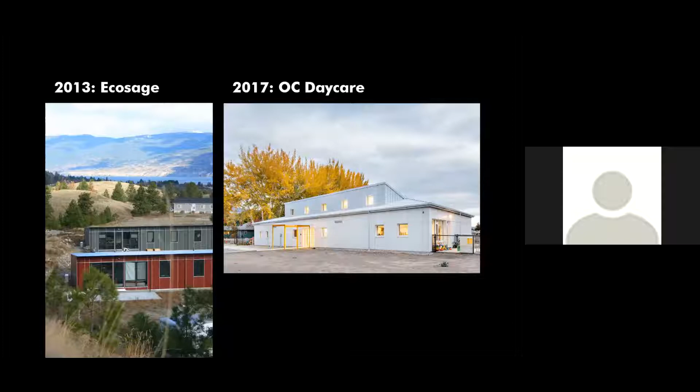Just a little bit of context to begin with. British Columbia has committed to something called the STEP Code, which has been written into the building code for the province. The goal of STEP Code is that by 2032, all new buildings in British Columbia will be net zero ready, meaning that with a reasonable investment in renewables, they can be made net zero energy. As a country, Canada has committed to net zero carbon emissions by 2050.

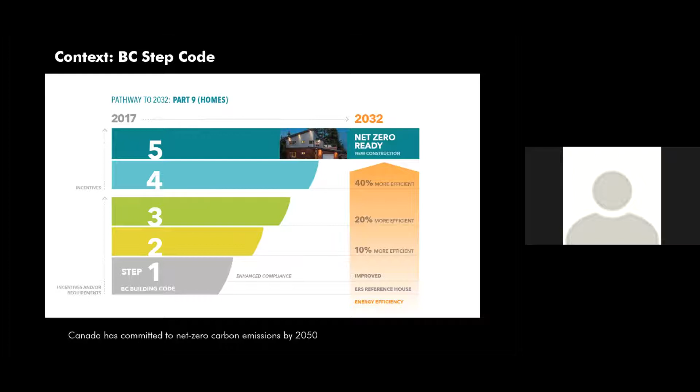So the work that we're doing, the work I'm going to talk about tonight, is moving towards these goals.

The Ecosage project, as I say, was done in 2013. We worked with Tabitha Enius at Penticton Indian Band, who runs their housing program. The builder was Nick Hill from Ritchie Custom Homes, and we had quite a bit of assistance from Fortis BC. Funding for the project came from the Penticton Indian Band, the Ministry of Energy Mines, etc., Fortis BC, and a contribution from Solar BC.

The funding primarily came from a program called the Super Efficient New Construction Program, which the provincial government was administering. The goal was to construct super efficient, marketable homes that would achieve a minimum energy rating, primarily through passive solar design, envelope construction, and super efficient equipment.

The houses through the Penticton Indian Band were given out to band members who could carry a mortgage, and that was a new program at that time. There's quite a housing shortage for band members, but these houses in particular required you to demonstrate that you could carry a mortgage to qualify, and 8 houses were constructed.

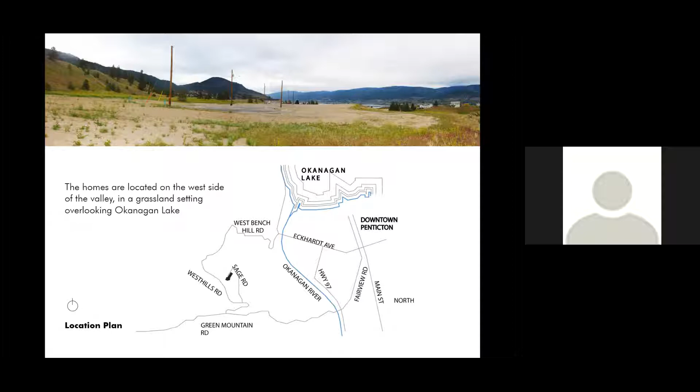There were 8 houses in total, and we arranged them all so they would face as close to south as possible. 6 of the houses were to EnerGuide 88 standard, 1 was rated by the LEED standard, so LEED Platinum, and the final one, which I'll focus on tonight, was certified passive house.

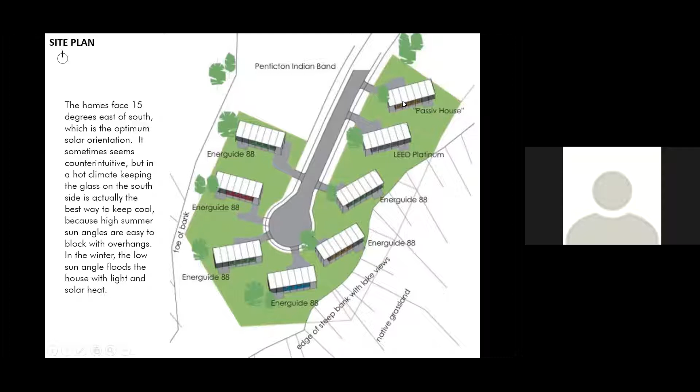The designs for the homes were very simple to keep costs down. Landscaping used xeriscape landscaping and durable, fire resistant materials.

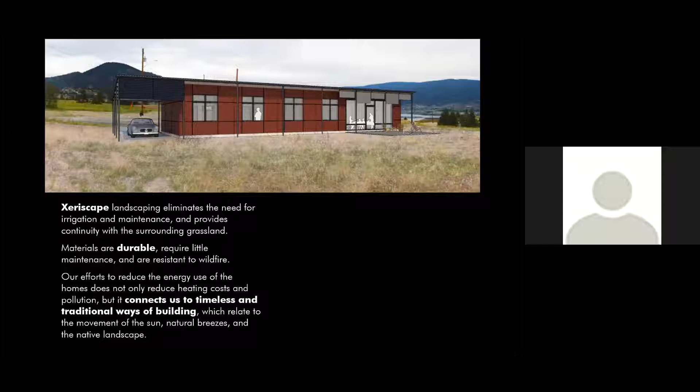The plan of the buildings was a simple rectangle, 4 bedrooms, a living space, and then all the services along the north side. In section, we sloped the roof up towards the south to open the buildings up towards the southern sun, and in that way get passive solar heat gain. The rest of the building was super insulated and openings were kept to a minimum.

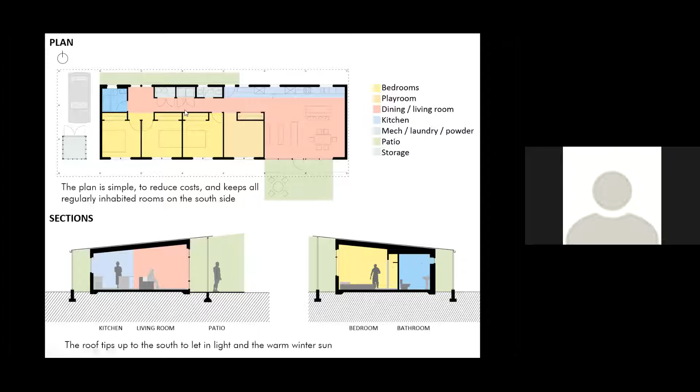The key to passive house certification and really to energy efficient design is the insulation. So the houses were designed to be super insulated boxes. We had light frame trusses for the roof, double 2x4 stud walls, and a well insulated slab on grade. And then that was made airtight so that the minimum of heat and air would be lost through the assembly.

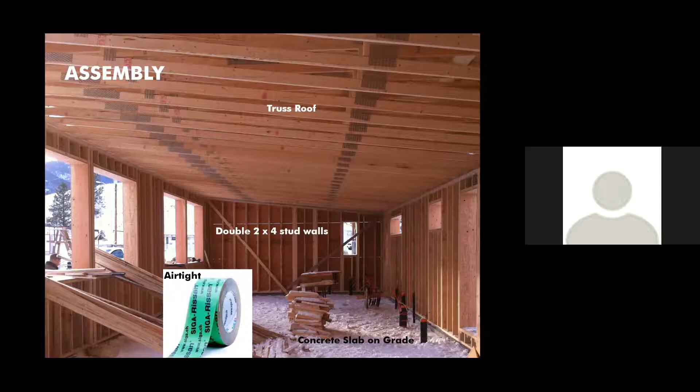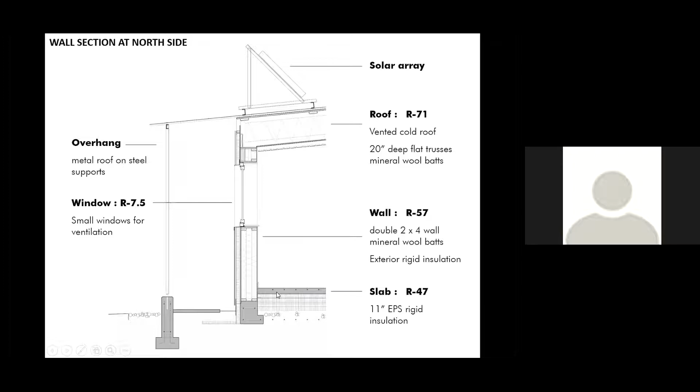And then the south side of the building, we tried to get as much glass as possible to allow that winter sun to give you passive solar heat gain. We have exterior shading to block the sun during the summer, and a good overhang also to block that sun during the summer.

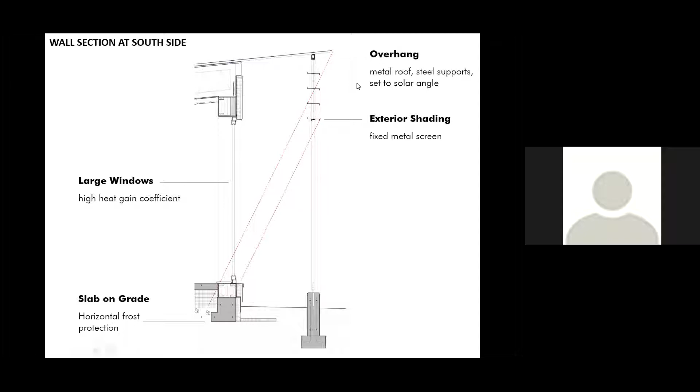Outside, the buildings had very generous overhangs. I particularly like this picture because it shows how that roof overhang on the south side - this is taken in about July - perfectly shades all those windows along that south side. You're getting a very little bit of sun coming in at the living room, but for the most part, completely protected from the sun in the summer. And in the winter, with the low sun angle, these windows would all be getting full sunlight.

The very light roof structure was supported by an exterior steel structure to provide protection all the way around the house. The siding is cement board and the roof is corrugated metal so that they're very fire resistant - of course, it's in an interface area. The windows are triple glazed, a hybrid of PVC and fiberglass. And the insulation is mineral wool that's manufactured in Grand Forks.

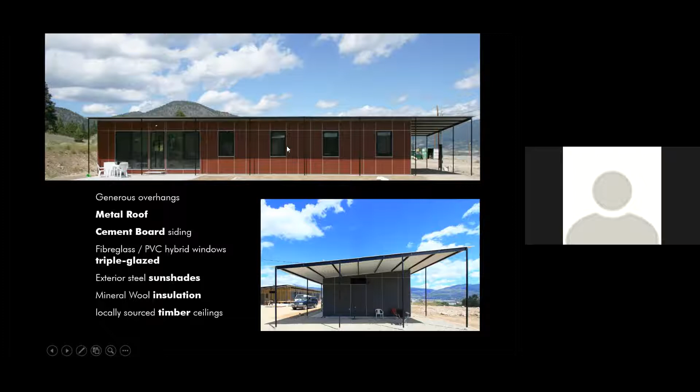Inside the houses, we had an exposed heated slab, and we used locally sourced wood for slat ceilings.

The equipment for the house, very efficient. We had a heat recovery ventilator so that lots of fresh air is brought into the space without dumping it to the exterior. We had a brine loop below the slab to preheat that heat recovery ventilator, air source heat pumps, solar hot water, high efficiency lighting. We had switches on the electrical outlets so that you could switch the whole house off when you left, and get rid of all those trickle loads that apparently add up to a fair bit of electricity over the course of a day. Daylight sensors to turn lights off when they weren't being used, and of course, energy efficient appliances.

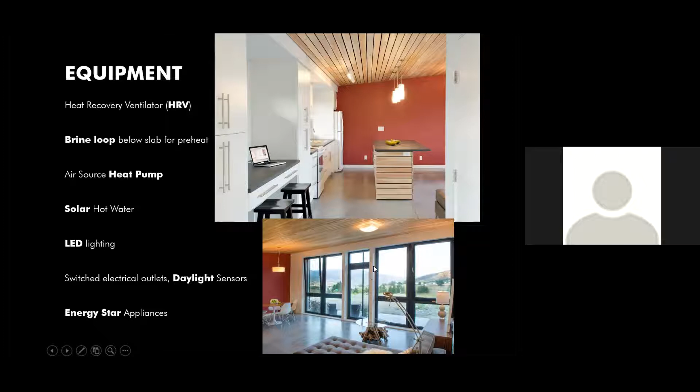So basically those first two elements, the envelope and then the efficient equipment, are reducing the amount of heat that you lose and then generating warmth in the most efficient fashion. So you're reducing your demand for heat and then providing it in an efficient fashion. But there will always be some need for energy.

So the energy that was required by the building is provided through renewable sources. There was a 9-panel photovoltaic array put on the building, a solar hot water array, and then of course we're relying on passive solar heat gain, natural daylighting, and natural cross ventilation to reduce the requirements for mechanical equipment to run as much as possible.

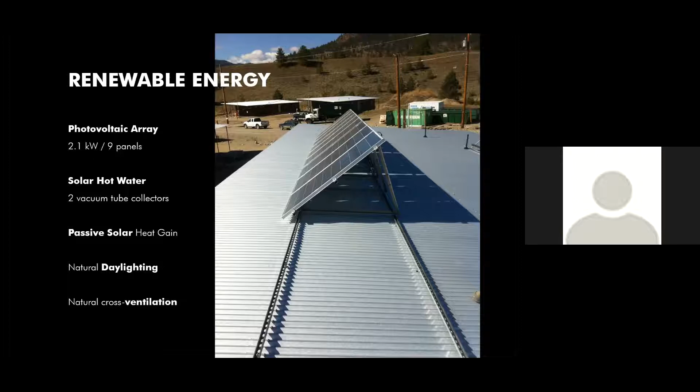As I said at the beginning, the project was intended to be low-cost housing, so we focused quite intently on the detailing, making it easy to construct in a very simple shape. Construction cost per house was $239,800. So the cost per square foot, $151 a square foot, and it took 6 months to build the 8 houses. This is far quicker and far less expensive than most of the other buildings that we work on.

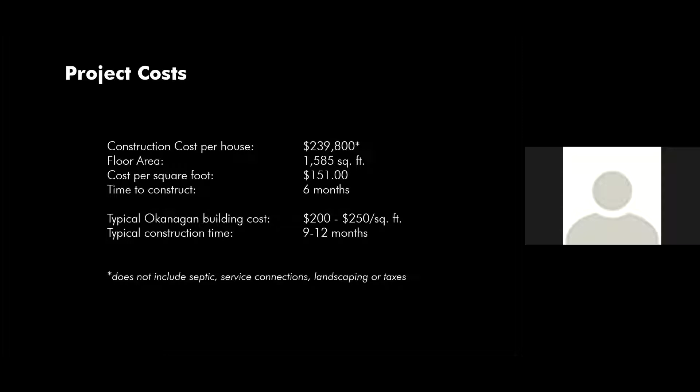Typical housing costs in the Okanagan in 2013 were $200 to $250 a square foot. Now that's risen to $300 to $350. And typical construction time, 9 to 12 months. So despite the additional effort that went into making these homes energy efficient, it did not make them more expensive or longer to construct.

So how did we do in terms of meeting our initial target? The energy use of the homes is about 45% of what a typical home would use. A typical code built house of the same square footage would be about 20,000 kilowatt hours a year. These ones were under 10,000. So that would mean it would take about 27 solar panels to become energy neutral. Now, because we provided 9 panels with construction, if the owners of these homes wanted to go to net zero, it would be an additional investment of about $12,000 to bring them to that level.

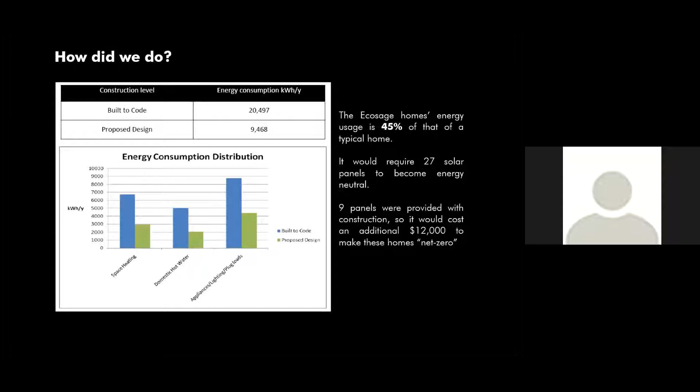So we took the things that we had learned from the Ecosage project, and a few years later, we had the opportunity to do a daycare for Okanagan College. Okanagan College has been very forward thinking in terms of pushing sustainable design and construction on their campus, and for this project, they really wanted to see a certified passive house project.

We put together many of the members of the team from Ecosage. Our architectural group and Ritchie Custom Homes as the builder went in as a design build proposal. We brought on board a team of local engineers from the Valley: Arcaneers out of Kelowna, Associated Engineering out of Kelowna, BC Building Science from the Lower Mainland advised us on our building envelope, and Certifiers Cooperative, out of Portland, Oregon, did our passive house certification. It's quite an elaborate model that needs third-party certification, so it was important to have a good partner for that part of the project.

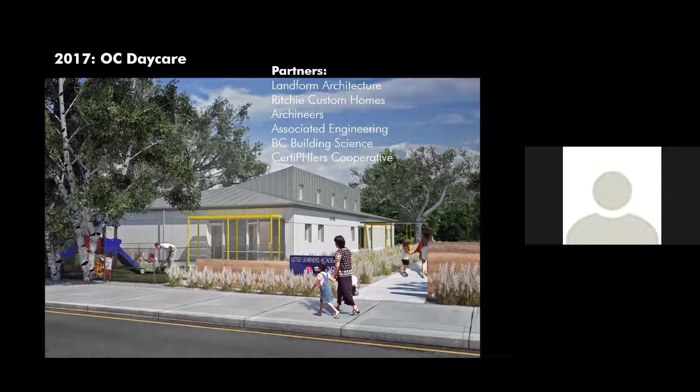The location is on the Okanagan College campus, the easternmost portion, which up until the time this building went in was basically a dog park, a meadow area. The main campus, including their living building, are to the west.

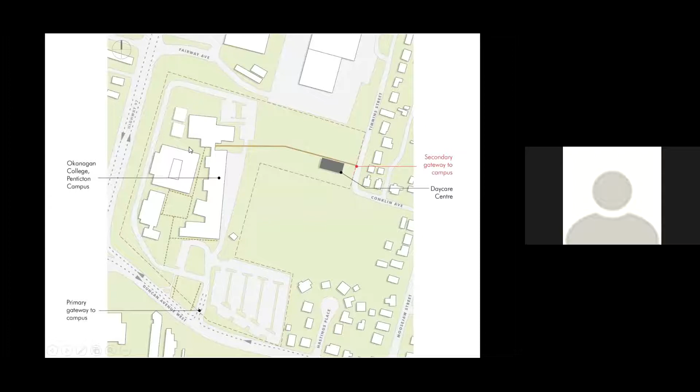The plan for the building is very simple. Having a minimal envelope really helps you achieve these energy efficiency goals, so it's a rectangular plan. There were 4 main childcare rooms. We tried to keep most of the windows towards the south, and the services and mechanical rooms are towards the north. Openings on the north are small for ventilation, and openings on the south are large to get that winter sun.

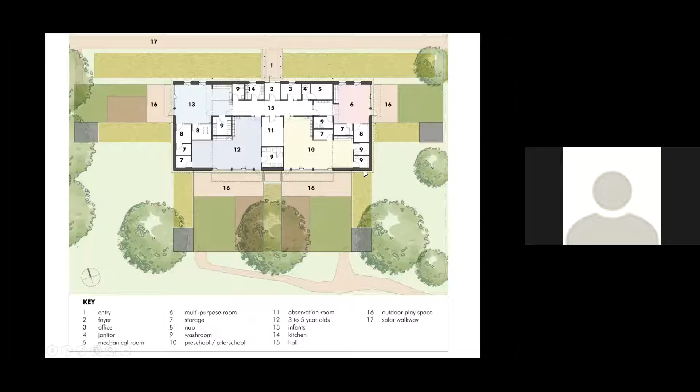The assembly focuses on creating something with a high level of insulation. We actually used polystyrene insulation to create a raft slab form, so there was no formwork for the slab. We used the insulation to create the shape of the slab with thickenings where needed, and then poured the slab right into the insulation and left the insulation there.

The rest of the envelope of the building was wood - double stud wood walls, pre-engineered truss roof structure. In this case, we used blown-in cellulose insulation because we could get really thick insulation values, especially in the roof.

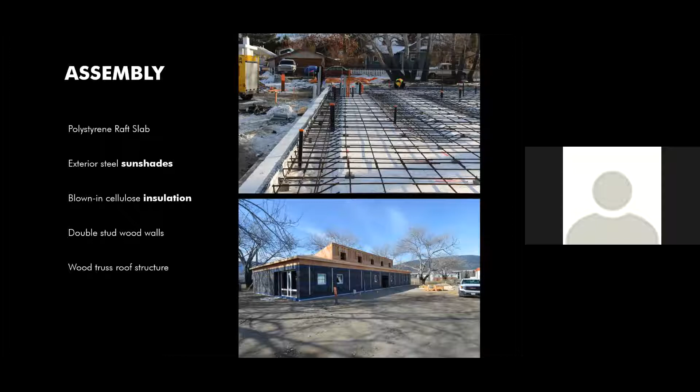For the equipment, we had a very airtight building assembly, so we spent a lot of time taping up and sealing that assembly. I think 0.39 air changes is the lowest number that has been achieved in the Okanagan.

We used a heat recovery ventilator to get maximum fresh air inside. If your building's very airtight, you want to bring in fresh air, so the heat recovery ventilator does that in a way that doesn't waste a lot of heat. We also have air source heat pumps, an earth tube to bring in air that would preheat our hot water, a heat pump water heater, and energy efficient lighting.

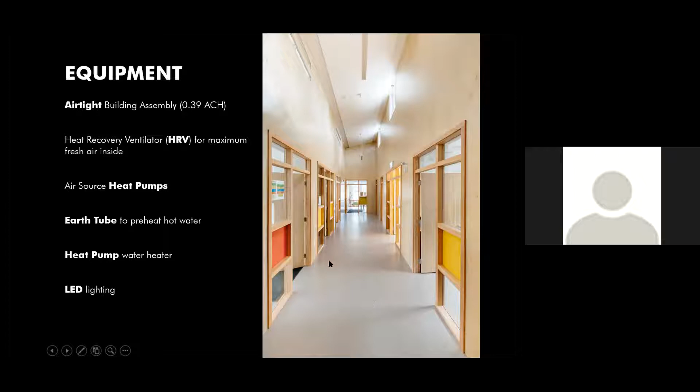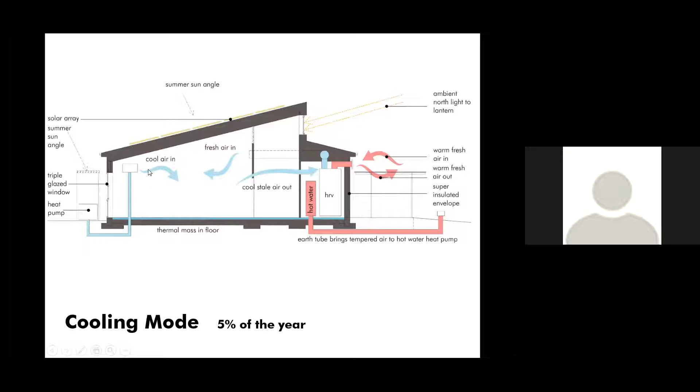A section through the building shows how it performs. It has a cooling mode, used for about 5% of the year, where the windows are closed and the heat pumps provide cool air to the space. It has a heating mode, used for about 25% of the year, similar to the cooling mode, except the heat pumps provide warm air, and the winter sun provides quite a bit of passive solar heat gain.

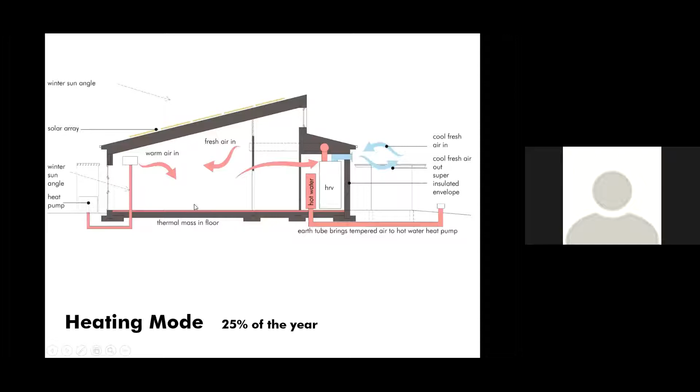Then the bulk of the year, it operates in what we call passive mode, which means nothing should be operating except your hot water. So you open the windows and air flows naturally through the space and out through the clerestory windows.

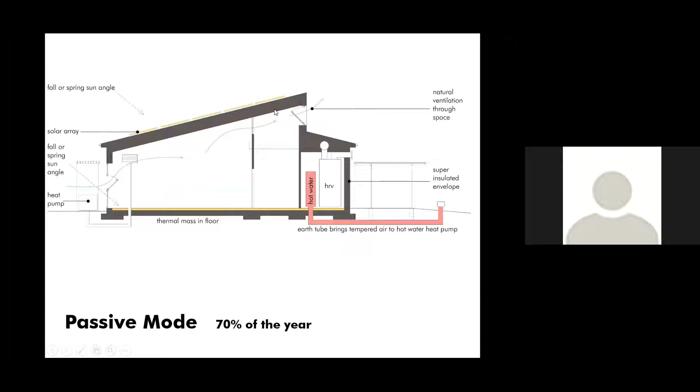So how did we do on this building? With the daycare, the building uses only 25% of the energy of a typical commercial building. A typical commercial building would use about 305 kilowatt hours per square meter. This one uses 72. In a year, it consumes about 16,000 kilowatt hours of electricity.

There's no gas, no carbon emitting fuels in the building whatsoever. And so for that 16,000 kilowatt hours a year, it would require about 45 solar panels to become energy neutral, which would cost the college about $30,000. And the roof has actually been sized to fit about 90 panels. So when those go on, which I'm sure the college will do in the next few years, it will be more than energy positive.

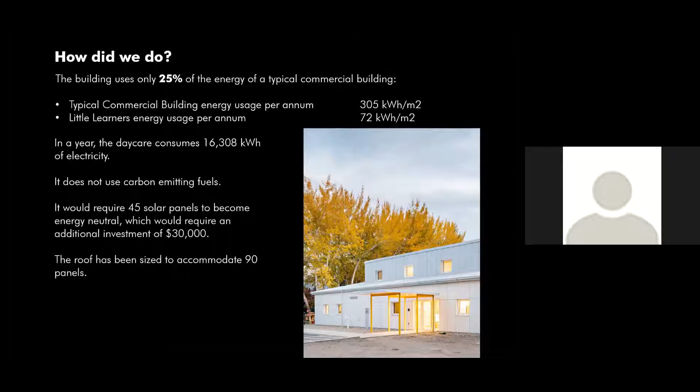But building energy use isn't the only way that buildings use energy. There's embodied energy - the construction of a building also uses carbon. Because we're working with Okanagan College, their Sustainable Construction Management Technology program analyzed this building, and they found that it sequestered more carbon than it used for material extraction, manufacture, transport, assembly, and 100 years of operation. That's basically because the structure of the building is wood, and the blown-in cellulose insulation is also a wood product. So the carbon that went into growing those trees is more than this building has embodied in its assembly. We don't use a lot of steel, concrete, or aluminum in this building, and that really helps because those are high energy materials to produce.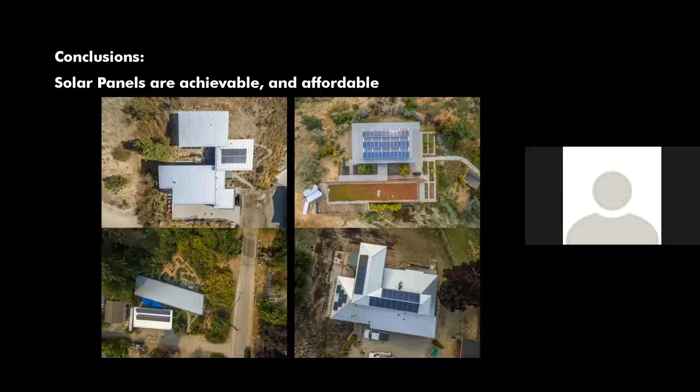And solar panels, which are the other part of being net zero ready, are achievable on any building, and they are now affordable. So let's get on with it. Thank you.

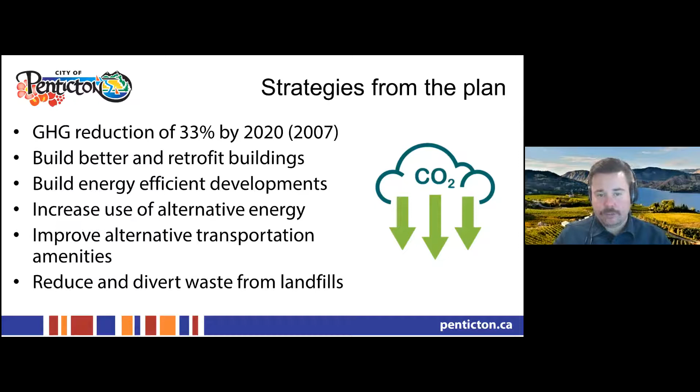Some of the current climate action initiatives the city has in motion are updating the climate action plans, voluntary implementation of step 3 of the BC Step Code, large-scale battery storage planned for 2023, rolling out more electric vehicle charging stations, and future waste diversion with the RDOS food waste program currently in the works.

The current climate action plans are now over 10 years old, and as many of the strategies and actions have been completed, it's time to update these plans. Over the past 10 years, the city has drafted a new OCP, and there are other big master plans in the works, such as the electric utility master plan and the transportation master plan. It's crucial to examine the long-term goals of the new OCP and upcoming master plans and find synergies with new and revised climate action plans. Finding these synergies and projects that support one another and reduce emissions will help make Penticton a greener and more sustainable community.

The updated plans will have fresh, science-based actions for continuing to lower community-based emissions, as well as extensive modeling to forecast potential emissions reductions. To help guide the rewriting of both plans, the city formed the Community Sustainability Advisory Committee, made up of knowledgeable and passionate individuals, including First Things First members who are on this presentation tonight, as well as council representation. We're working closely with and leaning on the committee heavily for their knowledge and to bring new perspectives to this planning process.

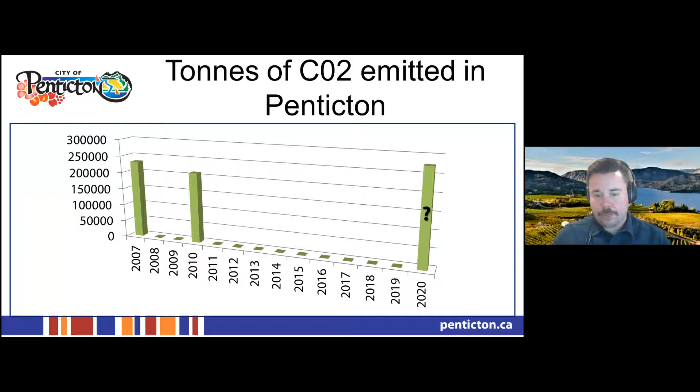To generate the carbon footprint of the community, we first look at emissions from three primary sources: transportation, buildings, and solid waste. The 2010 emissions inventory was compiled by the province for municipalities in BC, with the purpose of gaining a better understanding of emission sources, which can then be targeted and lowered. These inventories also serve as a baseline that future inventories can be compared to. Community emissions are calculated by quantifying the energy use of transportation, buildings, and solid waste.

When breaking down Penticton's community emissions, transportation accounts for the bulk of emissions at 63%, followed by buildings at 27% and solid waste at 10%. The combined total of community emissions for the 2010 reporting year was just over 200,000 tons of carbon dioxide emitted.

Breaking down the building emission sources further, the use of natural gas to heat residential and commercial buildings accounts for 92% of the emissions from heating buildings in Penticton. Using electricity to heat and cool buildings would significantly lower greenhouse gas emissions. As discussed tonight, the emission factor in comparison with natural gas is low because electricity used in BC is sourced from hydropower, which has a very low emissions factor compared to natural gas. Building new homes at higher efficiency, such as step 3 of the building code, the energy step code, will also lower emissions.

Of note, there are advancements being made with renewable natural gas that can help offset emissions from natural gas. Other interesting projects in the works: Fortis BC has partnered with UBCO, and they're studying how they can further reduce emissions from the natural gas supply by blending hydrogen through the distribution network. So we're eagerly watching that as well.

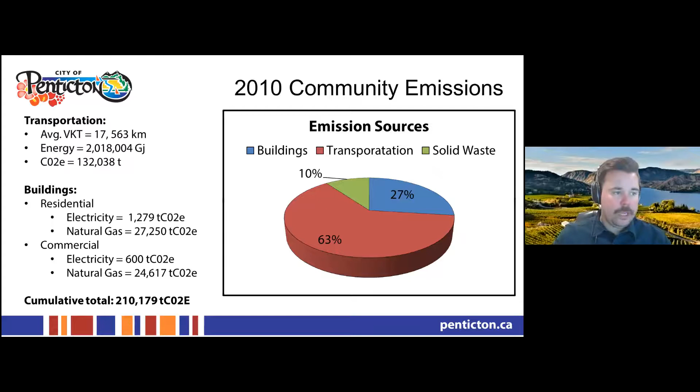So how can we lower emissions from new and existing buildings? Components of the existing community climate action plan that will remain relevant and be expanded upon during the updates are to build more energy efficient buildings and to retrofit and improve existing buildings.

For new builds, the focus is on improving energy efficiency, having high efficiency building envelopes, and developing programs that encourage the use of on-site renewable energy. Improving existing buildings for energy efficiency includes tightening the envelope, using energy efficient appliances, and air sealing of windows and doors. A program that will be highlighted and expanded upon by the revised action plans is the Home Energy Loan Program, which I will cover shortly in this presentation.

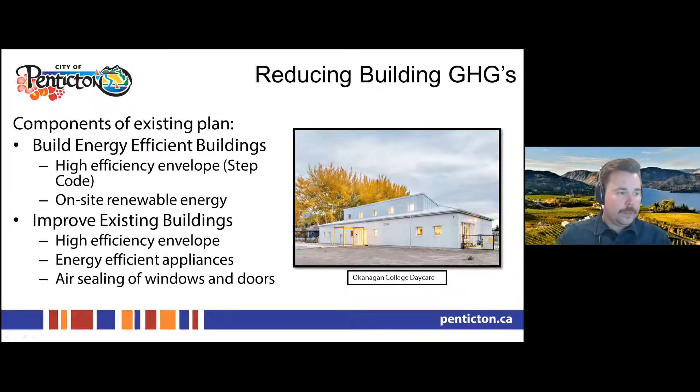So we're going to dive in a little bit to the BC Energy Step Code. We won't go too into detail into the requirements, but I'll give you a brief overview. The BC Energy Step Code is a regulation that sets performance targets for new construction and groups them into steps that apply across various building types and regions in the province.

The province of BC first introduced energy efficiency as a BC Building Code objective in 2008. Ever since, designers and builders have had the option to use either a prescriptive or performance approach to comply with the energy efficiency requirements. It's important to note that the step code is a performance approach that looks at a building as a complete system, not a set of individual components.

The lower steps are relatively straightforward to meet, while the upper steps can be a bit more ambitious. Penticton has been a leader with implementing the step code, having voluntarily adopted step 1 in 2019 and adopting step 3 ahead of the game as well.

As of January 1st this year, all Part 9 residential buildings now need to reach a minimum of step 3 of the step code. Part 9 residential buildings include single family homes, 3 and 4-plex units, row housing, low-rise construction, and accessory suites. By later this year, the city will also be offering incentives for Part 3 and light commercial Part 9 buildings that can meet a minimum of step 1.

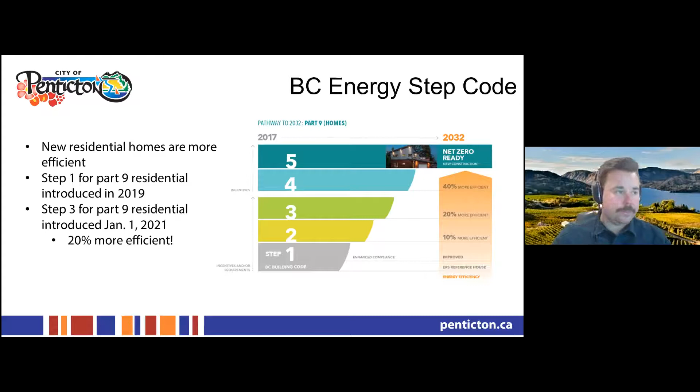Over the past 18 months, some local builders have achieved step 3 or greater of the BC step code, while others have had difficulty meeting the minimum requirements. Of the Part 9 buildings that meet or exceed step 3, the most common thread has been builders and designers educating themselves on how to build using the performance approach.

Achieving step 3 or higher of the step code can be done with minimal cost by taking a collaborative approach with owners, energy advisors, designers, building officials, and tradespeople. Although it's not mandatory yet, a mid-construction blower door test is highly recommended, and the city's bylaw may be changed in the future to require this test.

With funding support from Fortis, the city is offering $500 rebates per building per year, up to a maximum of 3 buildings, to help offset the cost of the blower door tests.

There's also some great tools out there like modeling software such as StepWin. StepWin is a software program that provides builders, designers, and energy advisors with simple ways to test different design options and considerations while designing a home. It lets designers move through different scenarios and find which solutions are the most cost-effective and energy efficient options.

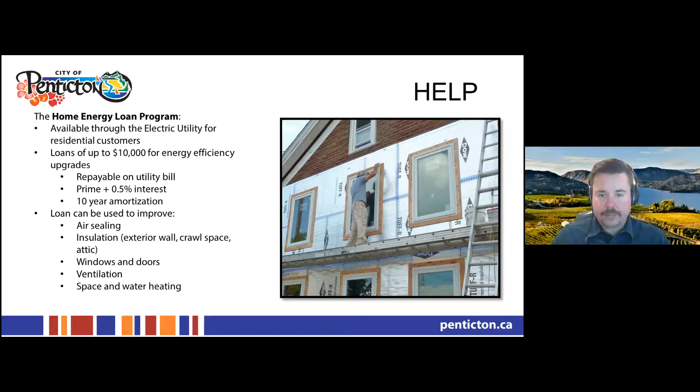HELP can be used for the same energy efficiency retrofits that are eligible for rebates through the FortisBC program, as well as any improvements recommended in the energy audit pre-assessment done on the home. Some examples of eligible upgrades include insulation, reducing air leakage, installing more efficient space and water heating systems, and replacing windows and doors.

So residents that sign up for the Home Energy Loan Program will first have an energy assessment conducted on their home and will also receive an EnerGuide ranking. The cost to homeowners for the assessment is $35, and the result is a comprehensive report that identifies which parts of the home should be retrofitted to have the greatest impact on energy use and costs.

After all of the recommended upgrades have been completed, a post-assessment will then identify the impact on energy and cost savings. The post-assessment has a cost of $200 to participants of the HELP program and can also be included in the loan amount. The pre and post-assessments must be conducted by a certified energy advisor licensed by NRCan.

The pre and post-assessments examine annual energy consumption minus any on-site renewable energy, how energy is used in the home, where heat is lost, and provide a detailed analysis of the building's envelope and mechanical systems.

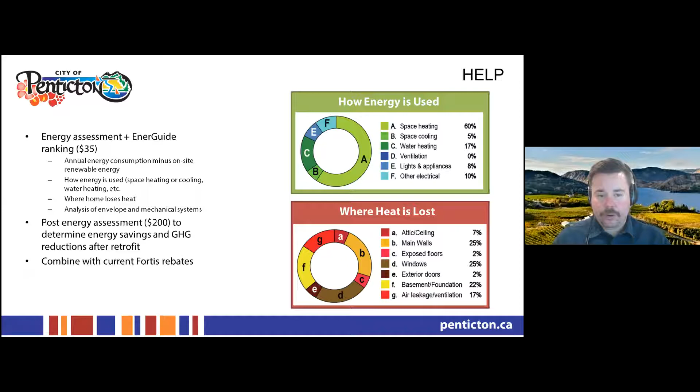In this slide is a real example from Penticton's HELP program, where we see 60% of the total energy is used to heat the home with natural gas, with water heating as the second largest energy user. Heat in this home is primarily lost through the walls, windows, and basement foundation. This assessment really helps homeowners target areas of their home to retrofit in order to have the greatest impact on energy and cost savings.

Continuing with the same example from the HELP program, the homeowner started with a single family home that used 145 gigajoules per year of natural gas and electricity. This energy use, the majority being natural gas with its high emissions factor, produced 6 tons per year of greenhouse gas emissions.

After using the HELP program to finance a higher efficiency gas furnace, their natural gas use dropped by 29 gigajoules per year, which also reduced the greenhouse gas emissions from this home by 1.6 tons per year. The HELP program really aids homeowners in retrofitting their property for energy and cost savings.

Another benefit of the program is that it helps reduce community-based greenhouse gas emissions generated from heating and cooling our residential buildings. This program will be advertised heavily throughout 2021, and it will be a subject of focus during the updating of the climate action plans, as we really feel it's an effective tool that can help residents finance energy retrofits to their home that they may otherwise not be able to afford.

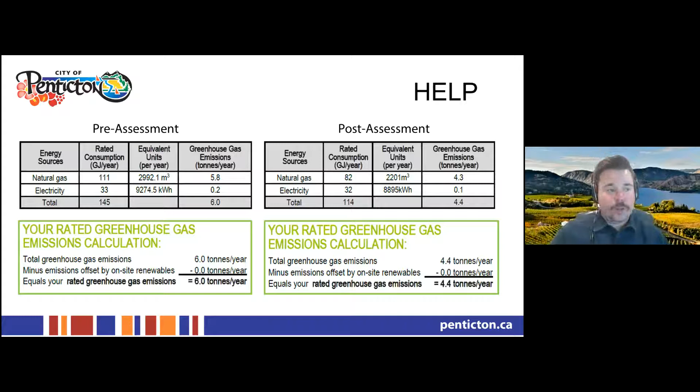So now we'll take a brief look at solar-ready homes. The term solar-ready applies to both solar photovoltaic panels and solar hot water systems.

During the construction of a new home, the cost to build a roof and walls strong enough to support a solar PV or hot water system is estimated at $200 to $500. A solar-ready system can then be installed at a future date for a lot less than it would cost to upgrade a home that is not solar-ready.

The province of BC has some great resources on solar-ready homes, including their 2013 regulations and solar hot water guide.

Section 3 of the guide to solar hot water regulation describes the requirement to provide for the future installation of solar panels or solar domestic hot water systems. This is the requirement to allocate an area on or near the building designated for future installation of solar collectors. Solar collectors may be installed on a roof, wall, building lot, or an accessory building such as a garage or carriage house that has ample and unshaded interaction with the sun.

The city is currently looking at how we can incorporate solar-ready requirements for all new single-family homes into our building bylaws, as it gives people the option to more easily and efficiently install solar panels on their home.

There are some increased structural requirements for solar-ready homes, including two conduit runs and an area designated for the future installation of solar collectors with a minimum footprint of 9.3 square meters. Structural members and roof trusses must also be designed to accommodate a uniform dead load of 0.24 kilopascals, in addition to design loads required by the BC Building Code.

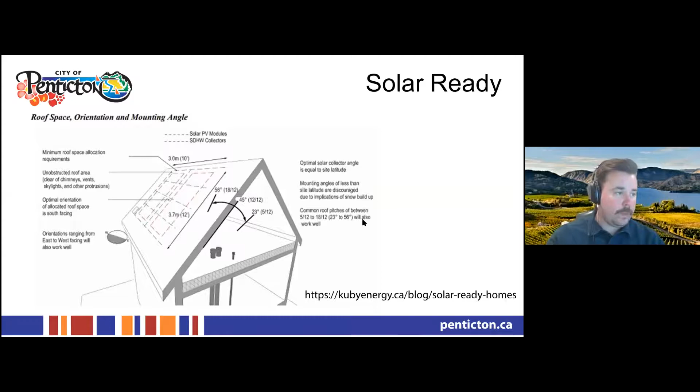So we've covered a lot of material in tonight's presentation. I want to thank everyone for hanging in there. I want to conclude my presentation by putting up the contact information for some city staff in case anyone's wanting to dive into any of these specific subjects a bit further. But I am here for some questions now as well.

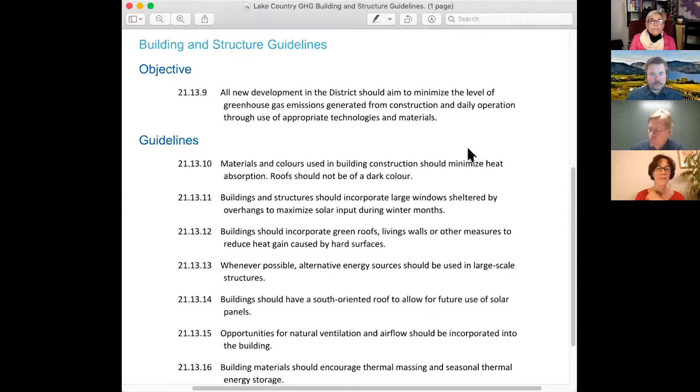Another reading we sent you was a bylaw from Lake Country. They have a GHG reduction and conservation DPA, development permit area, and this encompasses all of Lake Country. So when a new subdivision or private dwelling is being built, the DPA provides this tool - a series of questions for the homeowner to think through how they could be lowering emissions through their work.

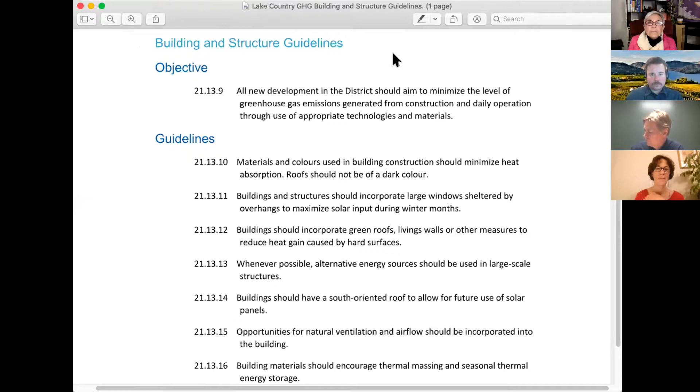And so Lori again is going to put on the screen and show you what some of the ideas are. So it's, what would you call this? Oops, it disappeared from my screen. Can you see it? I can't see it anymore. Could you put it on again, Lori?

It's voluntary for now, but it allows people to think about materials and colors, and they have a section of the website on this, large windows, and then they can have their home plan assessed by an expert so that they can say whether they fit in with the development permit area.

So it talks about natural ventilation. This is some of the guidelines to do with buildings. They have other guidelines for siting and for landscape. So I thought it was quite an interesting idea that an official community plan would include guidelines for creating energy efficient homes. Thanks, Lori. You can take that off now.

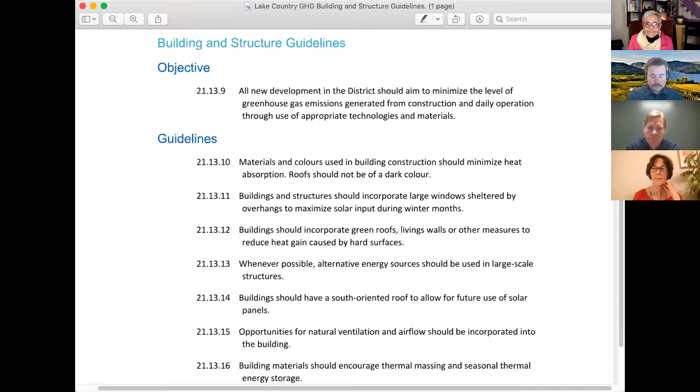We have a few people that work for the city or city councilors, two of them here. Any ideas on whether this sort of thing might be looked at for our region? Again, it is voluntary right now, so it's just a tool for homeowners to use.

Yeah, the city used to have a sustainability checklist that was given out to builders. Yep, and for reasons I'm not entirely sure of, that kind of dropped off, but that is something as well that we are looking to bringing back up to the table - a voluntary style checklist. That's really just that educational component.

Great. Well, those were two things on my list from the readings. Any other thoughts that have come up either from the presentations tonight or from some of the readings you've done? Any questions you have or comments just you want the group to think about? And this time, feel free to just maybe raise your hand and unmute yourself.

Kari: Yeah, I just have a question. I'm not sure how on topic it is, but the question about the refrigerants, which as you were saying, David, is like number one on the list in the drawdown book. And there's no particular plan in Penticton, and I really don't know what locally we can or should be doing about that. But it seems like kind of a gap because there's a lot of work that's going on in some of these other areas. Does anyone have more information about that?